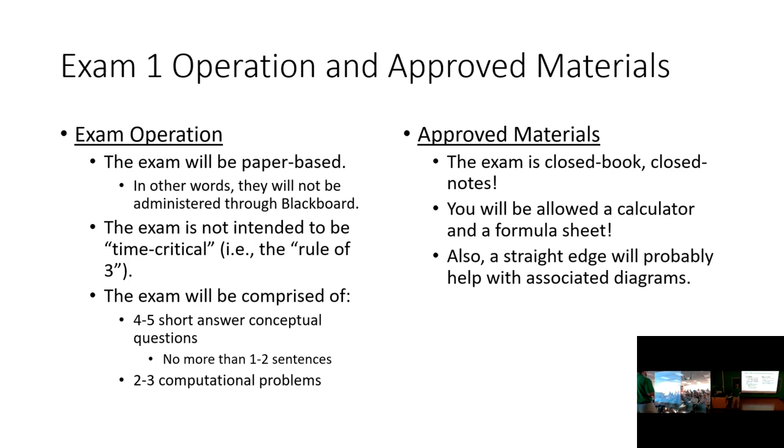The exam is closed book, closed notes, but you are allowed a formula sheet, you are allowed a calculator. It's probably not the worst idea to bring a straight edge. I don't know if you have like your student ID or something that can draw a straight line. I will admit, this probably doesn't matter a whole bunch for this exam, but there are some exams later where having a straight edge really would help, particularly exam 3, when we start drawing shear and moment diagrams and doing truss analysis and things like that, that having a straight edge really can make your life a little easier.

Now, in terms of the formula sheet, this is an 8.5 by 11, both sides, front and back. You can put whatever you want on it with the following stipulations. Okay, I want you to put your name on it because I'm going to collect them after the exam. Okay, I ask that you don't put any fully worked out example problems. That is not some stipulation where I'm trying to be a jerk to you. That truly is for your benefit, and I'll give you a perfect example of that.

So let's say that you have a force on a homework problem that was at a 3 to 4 slope ratio, and then the exam problem has a 1 to 2 slope ratio. Suddenly you're doing the exam problem and you're pulling numbers from your formula sheet, and now there's 3 to 4 slope ratios that showed up on an exam problem that had nothing to do with the problem, right? So it ends up creating more confusion for you as a student. I have seen that happen a lot when I said whatever on the formula sheets. So I don't think that fully worked out problems on the formula sheet really help you out. I actually think it hinders you, which is why I'm asking that you don't do that.

The last thing is that the formula sheet needs to be prepared by you. In other words, I'm fine if you handwrite it. I'm fine if you word process it. I'm fine if you take an image here and there from a PowerPoint and snip it out into your formula sheet, like if there's some figure that really explains things very well, that's fine. But what I don't think is a good idea is to just take the PowerPoint, copy and paste the whole thing onto an 8.5 by 11 and hit print. I don't think that's an adequate use of your time in actually studying. I actually think that crafting and creating the formula sheet is studying. By going through and organizing your thoughts and putting them on paper, I think that's actually the study process.

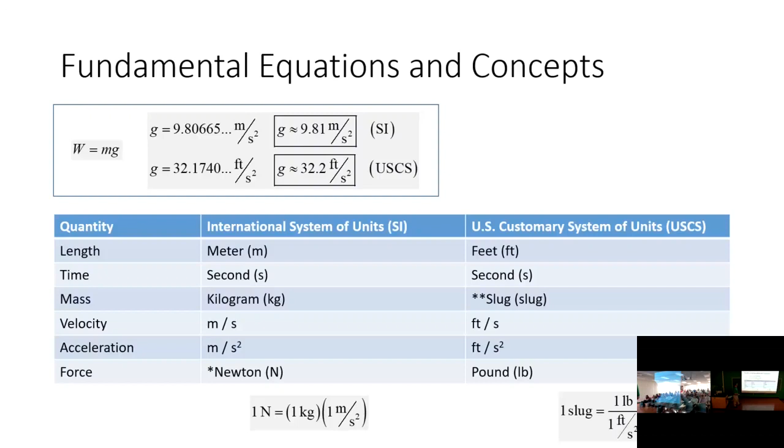So first off, we've got the relationship between weight and mass, and that's the acceleration due to gravity. So I have that in both SI and US units. I have our fundamental units in both SI and US units. And then we have our relationship for our Newton and our relationship for our slug.

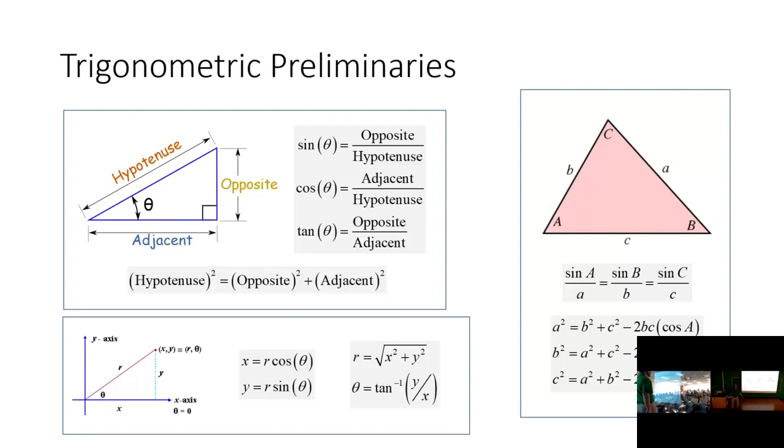In terms of IJ notation or IJK notation, this sort of leads into the basics of vectors. So the first is the concept of commutativity. So that means that we're graphically adding vectors in that tip to tail fashion. But what we learned based off of this graphical observation is that vector addition is commutative. So that means that the order of operations doesn't matter. A plus B equals B plus A, or P plus Q equals Q plus P.

We have the definitions of our three essential basis vectors, IJK. So IJK are unit vectors. So remember, a unit vector is a vector with a magnitude of 1. The I vector points in the positive x direction. The J vector points in the positive y direction, and the K vector points in the positive z direction.

And so what we can do is we can take any arbitrary vector pointing in any direction in 2D or 3D space and just say it's so much I, so much J, and so much K. So we can express vectors in a consistent format. So that's where IJK became so powerful. This is our means of taking an arbitrary vector and resolving it into a two-dimensional algebraic IJ expression. And as you know, we can do similar operations in 3 dimensions as well.

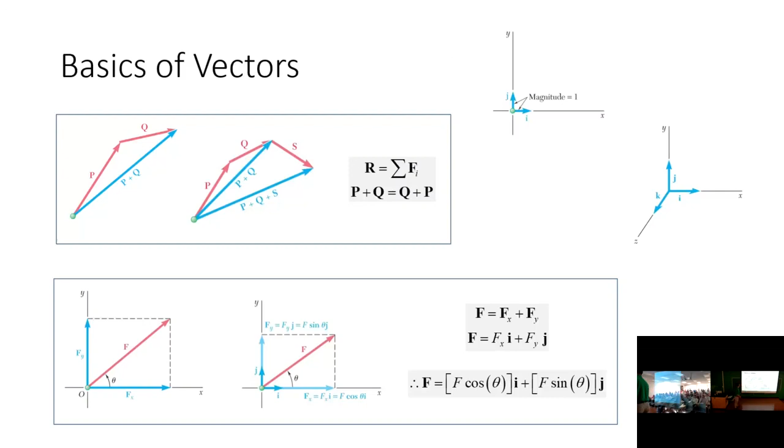I would argue that the only thing that's really, really different beyond describing the vectors is how we express orientation in 3D. So in 2D, we can just look at it from a given angle. So we can just say, from the x-axis. That's why we have cosine and sine. In 3 dimensions, a more standard way of doing that is to use directional cosines.

And directional cosines are really just the angle from the x-axis, from the y-axis, and from the z-axis for a unit vector. But we can look at the math and see that each of these terms are just the cosines of those angles. So if you have a unit vector, just take the inverse cosine of those constant coefficients, and boom, you have the angles from each of your x, y, and z axes.

And that's all that I have on review. So that's pretty much it. That's what's going to be on the first exam. I formatted the exam so it's all stapled together and there's a problem per page. The problem's up here, so you should have ample room to write on the exam, and you could write on the back page if necessary.

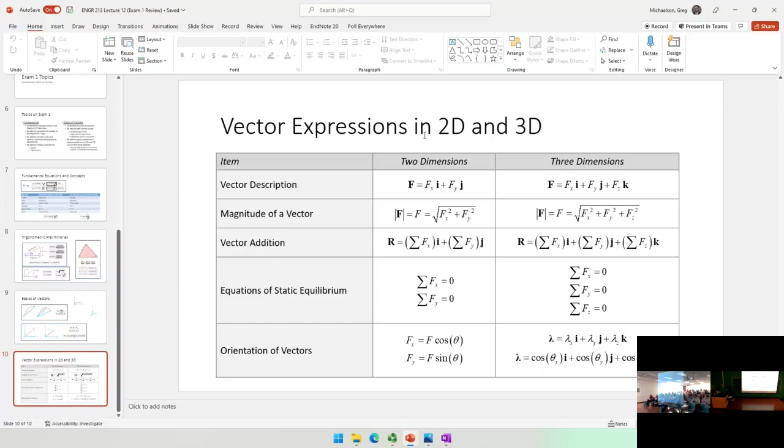I would argue that one is probably one of the trickiest problems we'll have all semester. And I'll also tell you that I'm not trying to trick you like that on the exam. I'll go ahead and tell you that. But I do want to go through that problem because I was sort of expecting that somebody would ask about 2.5. So let's see.

So really the secret to 2.5 is this image right here. Well, maybe if the little dialog box. Okay, I don't care that much. Okay. So I think the secret to homework 2.5 is this image right here. Once you figure out this image, then the rest of the problem, the homework is pretty rote.

So what we have is a scenario where there's a weight pulling down on the given spoke of a pulley. But the way that the pulley cables are oriented, there's 2 cables going up this way and there's 1 cable going this way. So the way that you figure that out is, remember, we're using our samurai sword or lightsaber, our secret weapons of engineering here.

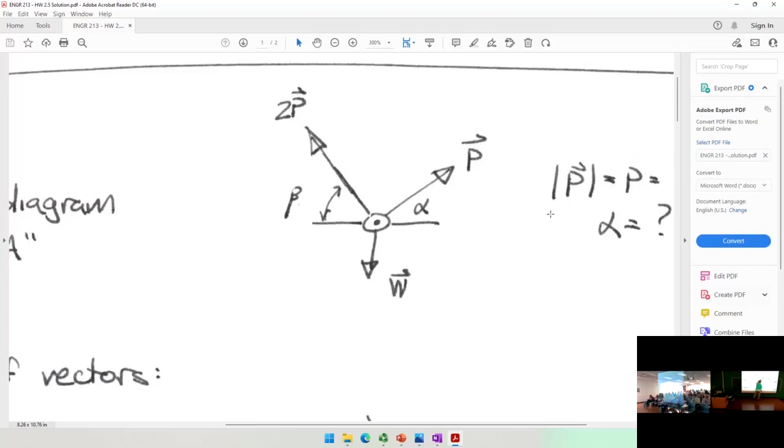So when I cut a section through this wheel, I'm cutting through basically 1 P here, but 2 P's here. So what I'm doing is I'm just describing these vectors, all 3 of them in IJ notation. The only thing is this is P and this is 2P. So once you figure that part out, the next steps then are as follows, okay?

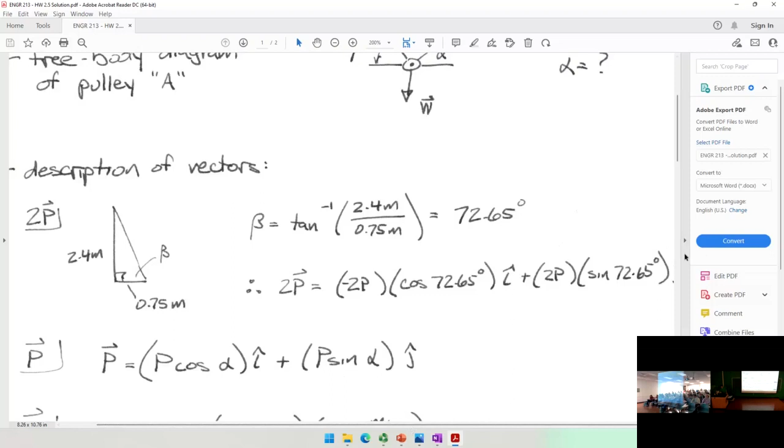So if we look at the description of the vectors, here's the free body diagram. We actually know what beta is. Beta can be ascertained from the definition of the problem because we know that this rope goes up 2.4 and over 0.75. So what we can do is, let me get this little menu out of the way, we can write this 2P vector in ij notation where P is the only unknown.

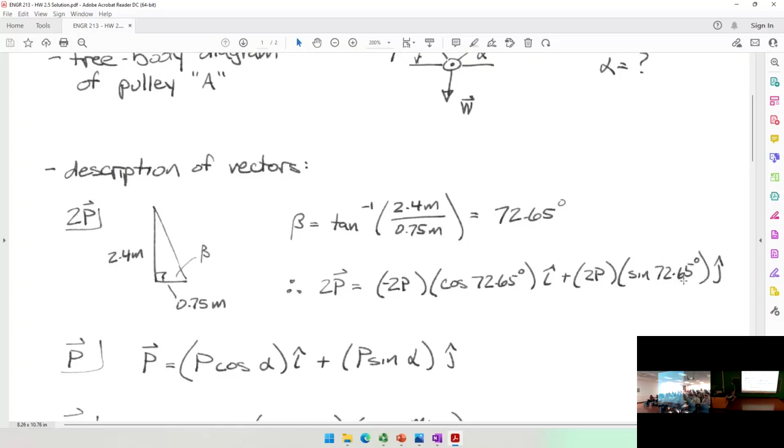Whereas with the P vector, the goal of this whole problem is to try and determine P and to try and determine alpha. Okay. So once you get your free body diagram, like with any problem, the next step is to describe each of these vectors in ij notation, which you can see I've done right here: the 2P vector, the P vector, and the W vector, all written in ij notation.

And remember, this is a 2D problem, so we should have two equations and two unknowns. And we do. The two unknowns are the letter P, which is the magnitude of that force inside the cable, and the angle alpha. Okay, so this one's a little different where I'm asking for an angle and a force. But again, those are two unknowns.

Okay, so now that I've got my three vectors, the next step then is to add those vectors up in ij notation. Now, if I add up the x components first, I've got this here plus this. The W vector doesn't have an x component. So what do we have here? Well, I notice that the P's cancel. So I've got the cosine of alpha equals 2 of this. So all I have to do is solve for alpha,

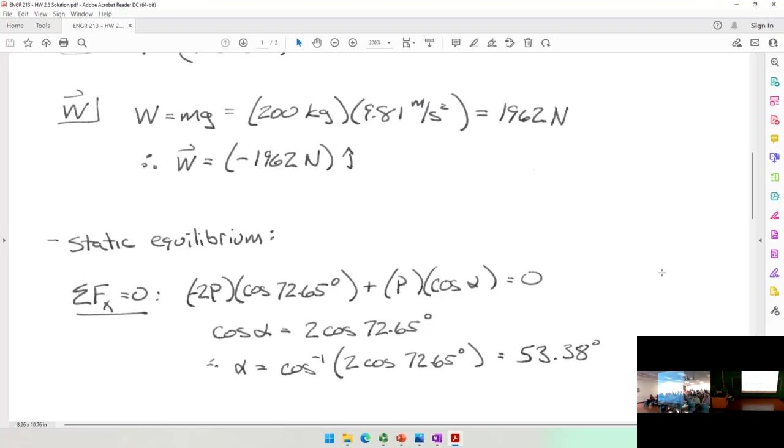and I get alpha as 53.38 degrees. Then I sum forces in the y direction, but now I know what alpha is. So just plug and chug, and I get P is 723.58 newtons. I know that probably went kind of fast, but all I'm doing is adding up the y components for each of those vectors, and I know what alpha is. So look at this remaining expression. I think I moved the 1962 over here.

So what do I have? I can factor P out of that line. I get P times 2 times this plus that. Just divide by that whole blue, and I get P at 723.58 newtons. So that's kind of the approach to that problem. And again, I know that's probably the trickiest problem I've given you during this module, and it will probably be one of the trickiest ones I give you all semester.

So I want to stop for a sec. I rambled on. Did I answer your question? Yes. Okay, how about everybody else? Because sometimes I do that. I just go on and on. It's like, wait a minute, I'm not actually addressing what you asked. So

Maybe, but not this complicated. In no way, shape, or form am I going to trick you as much as this. So pulleys are on the table, yes, but not this hard.

So I was looking on the homework, I think it was either the third homework and then the fifth one. It was actually asking about the direction of the resultant, and one answer was with an angle, and the other one was with a basic number. A unit vector? Yes, a unit vector. How did those differ? Is there like a question in the...

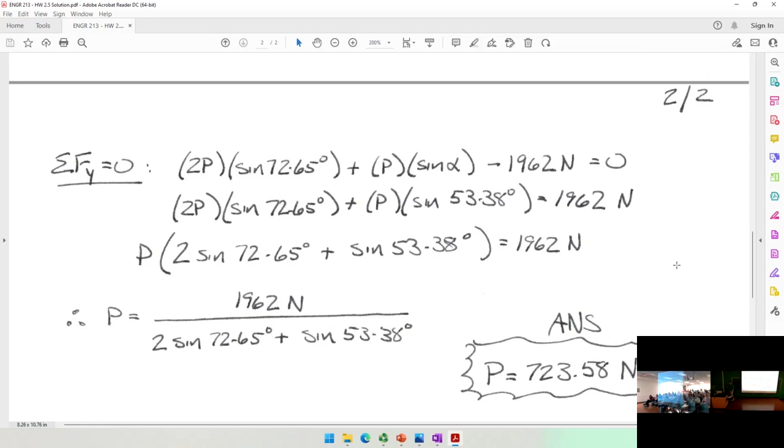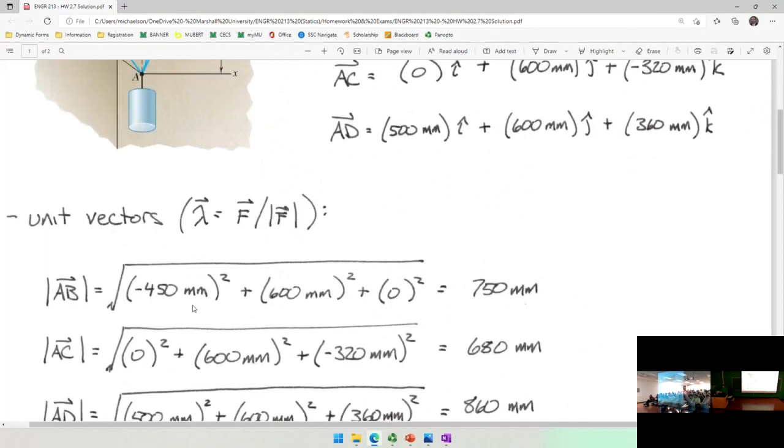Okay, now let me say a couple things about not just 3D, but I want to talk to you about how I grade in general, because I want you to understand my approach. Generally, I tend to use two approaches when I grade problems. The first is what's called a correct for data approach. So let me explain what a correct for data approach means. If you have a problem that takes 10 steps to solve, and you make a mistake on step 2, I'm going to deduct points for that mistake made on step 2. Not if the other steps are completely fine, okay? So I'll tell you how that goes.

So let's say you have a problem on the exam. I will have an Excel sheet set up that goes through the solution for that given problem. And then I'll take your work. If you got the same answer I did and you showed your work, it's right, move on. But if you're not getting the same answer that I did, then there's a mistake. And what I will do is I will go through and see, okay, what's the mistake? And if it's only this one value, and if I change that one value and I get the same answer that you do, then that's the only thing that you got wrong. So I'm only going to take off for this. So the point I'm making is what I'm not going to do is take a look at my answer, take a look at yours, and go, oh, minus 30, it's wrong.

I'm not doing that, okay? I'm going to go through and give partial credit as much as possible, okay? The reason why I'm going on about that is because I think the hardest part about 3D is this, the very, very first part, which is just defining the vectors, okay? I'm sure that there's going to be people that have an error on, let's say, the AB vector, and it causes the rest of the problem to have errors that cascade through it. My goal is to only deduct for that one error, not for the whole thing. You see what I'm saying?

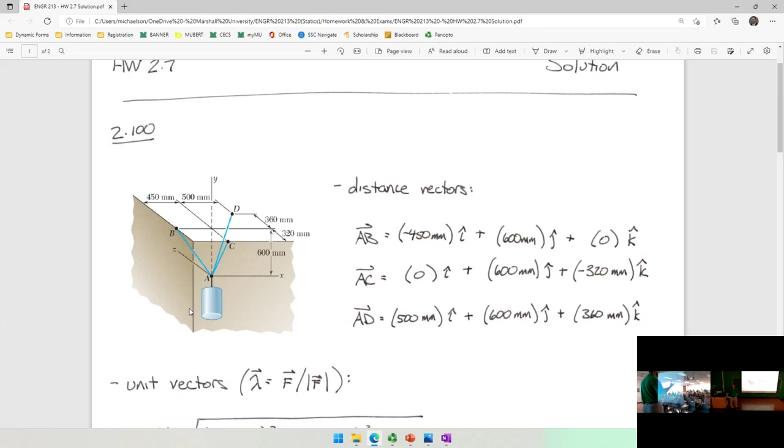Okay, and now that I've got my distance vectors, I can use them to describe the force vectors. How do I do that? I take those distance vectors and I convert them to unit vectors by dividing by their own magnitude. So I compute the magnitude of each of those vectors using the Pythagorean theorem, and then I divide each of those vectors by their own inherent magnitude to yield these. These are unit vectors. Unit vectors have no dimensions, right? So it's just negative 0.6, 0.8, and 0, and so on and so forth.

And then I take each of these vectors and I multiply them by their respective magnitudes in order to get the force vectors. Now, what we find in this problem is that I've got, here's TAB, here's TAC, here's TAD, here's W. So here's the vector IJK, IJK, IJK. Now, in this problem, this is a 3D equilibrium problem, so we have 3 equations and 3 unknowns.

While the 3 unknowns are a little different, in the problem that we did in class, the 3 tensions were the unknowns. In the one on the homework, we were given one of the tensions, and we've got to solve for the other 2 and the weight. In the end, it's 3 equations, 3 unknowns. So the very first stage of the problem is to get to this right here, where you have described each of those forces in IJK notation, okay? And so this is what I've got, all right?

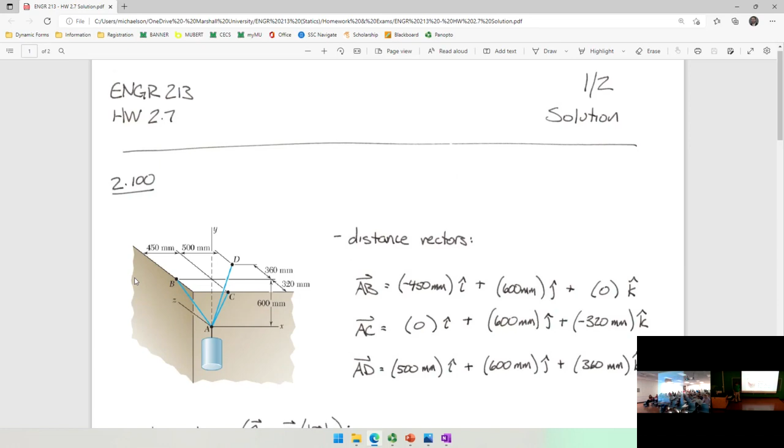Mostly, once you get the IJK of what you were calculating, how do you go from that to the magnitude of the weight? So what step are we talking about? Are we talking about, Very last. you're talking about right from here? Like if you keep going down, how do you get W 9.7? Okay, all right, let's talk about that. So before we talk about W, let's make sure, are you okay with these?

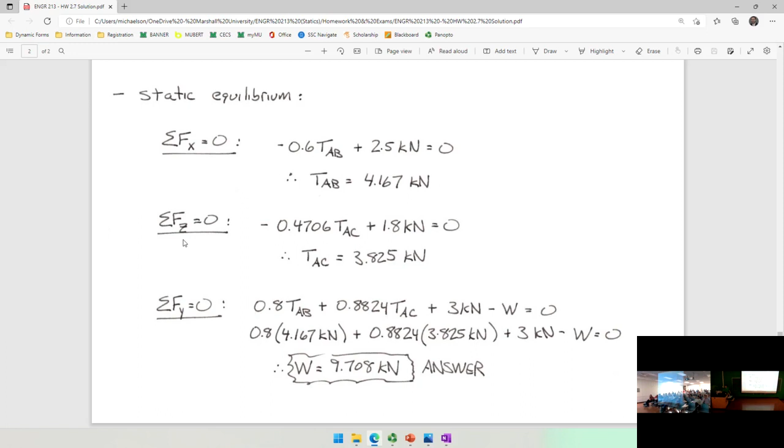Yeah. Okay, so I think the first question is how do I get the equation, the first line? The way I get the first line is I sum up the components in the y direction, okay? So if I sum up the components in the y direction, what do I get? 0.8 TAB, 0.8824 TAC, 3 kilonewtons, and negative W. So that first equation that you see is just summing up these components and setting them equal to 0. That's where I get that, okay?

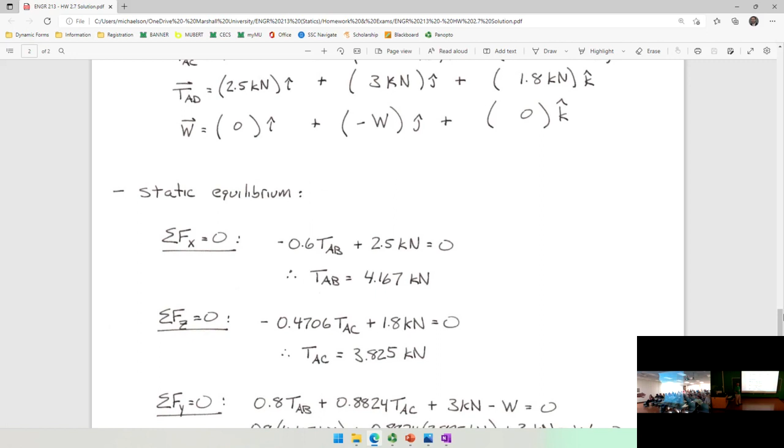So before I move to the next line, are you okay with how I got this? Does that part make sense? If not, we can go back. Yeah, it makes sense. So here, maybe a good way of doing it. I'm sorry if this is kind of small, but I'm going to zoom out a little bit. So this equation right here is just summing up that column, right?

Because, for example, if I sum up this column right here, that is the sum of the forces in the x direction. This is the sum of the forces in the y direction. This is the sum of the forces in the z direction. So, for example, if I sum up forces in the x direction, what do I get? Negative 0.6 TAB plus 2.5 kilonewtons equals 0, right? If I sum up the z direction, what do I get? I get negative 0.4706 TAC plus 1.8 kilonewtons equals 0, right? So that's where this equation comes from.

With me so far? Okay, now I look at this equation. So how many unknowns are in this equation? How many variables? I've got TAB, TAC, and then W, right? But notice how TAB I had already solved. I had figured that out from doing one of the earlier expressions. And TAC I had already figured out from doing one of the earlier expressions.

So what I'm doing in the next line is I'm just substituting those in. So where it says TAB, I'm plugging in this. Where it says TAC, I'm plugging in this. Now, look at the equation. So let's look at it now. I've got a number times a number, plus a number times a number, plus a number minus a variable, right?

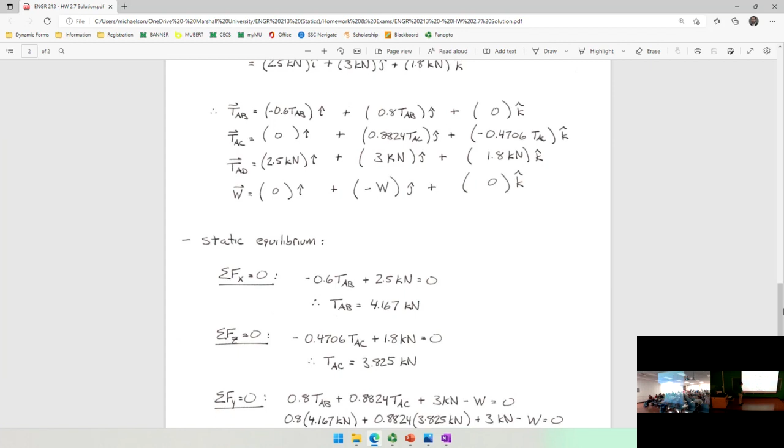So see, this W is now the variable. But look at it from an algebra perspective. See how I got a number plus a number plus a number minus W equals 0? If I move W to the other side of the equation, well, by golly gosh gee, I've now solved for everything. So W is just that, and if you do the math, you get 9.71. Did that answer your question? Yeah. Is everybody else clear about that? Because I want to make sure that's clear for everybody else here.

And I want to be, again, clear about something else. If you were more comfortable with taking this system and writing it in a matrix form and putting it in your 3x3 solver, that will work, okay? There's two things I would point out about that. The first thing you've got to do is make sure that you write your unknowns in order in every equation. So it's got to be TAB, TAC, W, in every equation. So that when you plug that in your solver and your calculator spits out X, Y, and Z, you know that Z corresponds to W.

That makes sense? The second point I would make is that because of the nature of this problem, if you go through using a 3x3 solver, you're going to get a lot of zeros, okay? Because you have these really simple expressions here where you just get TAB equals that. So when you plug in that 3x3 matrix, a lot of those terms might be zeros, but there's nothing wrong with that. It's just going to happen because of the nature of the problem. Does that make sense? Okay, any other questions about this? And I want to make sure I answered your question. You good? Okay, how about everybody else? This is good stuff. I like this.

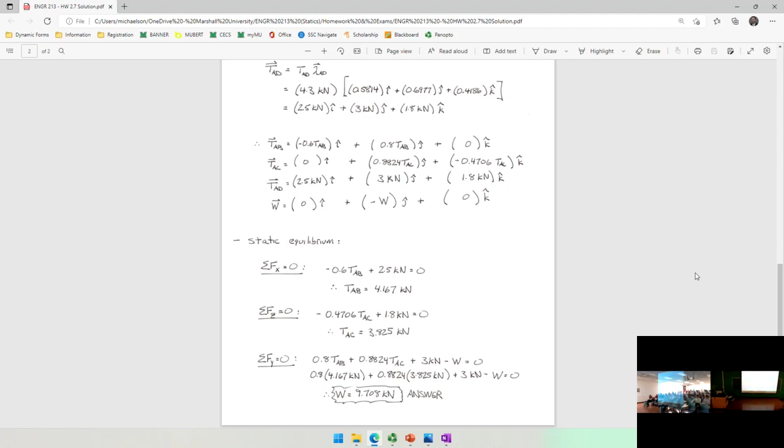Is our equation sheet 1 or 2 sides? Both sides. Both sides. Yes? It sounds dumb, but 8.5 by 11, is that like a notebook paper? That's just like a copier paper. Okay. Yeah, I'm saying that's as big as it can be. If you have a sheet of paper like one of these and you use this, this is smaller than 8.5 by 11, so you could fill that and that'd be fine. Cool. 8.5 by 11 is like just a copier paper.

Yes. So that's a good question. What I would do primarily is focus on, if you're looking at terms, I would focus on the fundamental lectures, like lecture 2 and lecture 3, and probably a little bit into lecture 4, because those 3 lectures were where we were setting the stage for what vectors are, what classical motion and Newton's 3 laws were, and so on and so forth.

I don't think you need to go beyond that, because I think everything beyond that was, let's take these definitions and apply them. But what I will tell you is I'm not going to ask you anything like, what was this one term on slide 14? What did I mean by the second bullet? I'm not doing that. These are very fundamental basic concepts. If you had a pulse and respiratory pattern, you saw what I was talking about. So, yes.